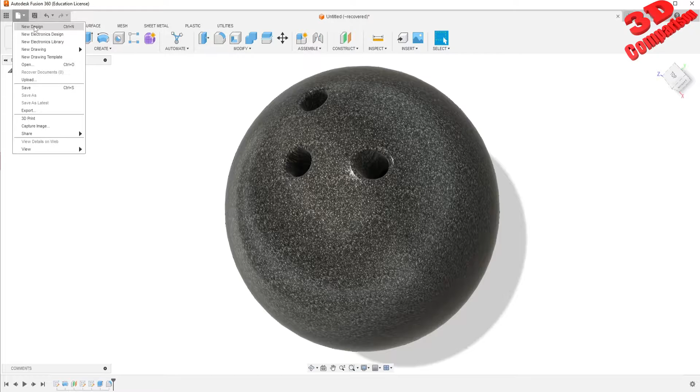I will enable the reference and create a new sketch. The sketch will be a circle, and the diameter will be 220 millimeters.

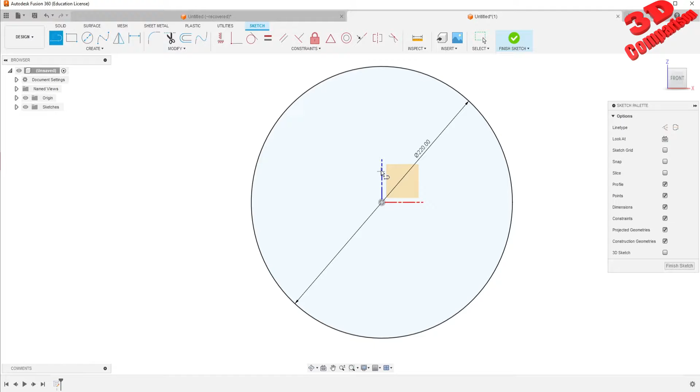I will also create a line in order to define the axis over here. As we can see within Fusion, we have the line option over here. If I drag my mouse over here, we're going to have this snap to the middle.

If I want to convert the line type, I can use this construction button, or there's also the possibility to use the hotkeys. In this case, if I press X, I can have this converted to an axis.

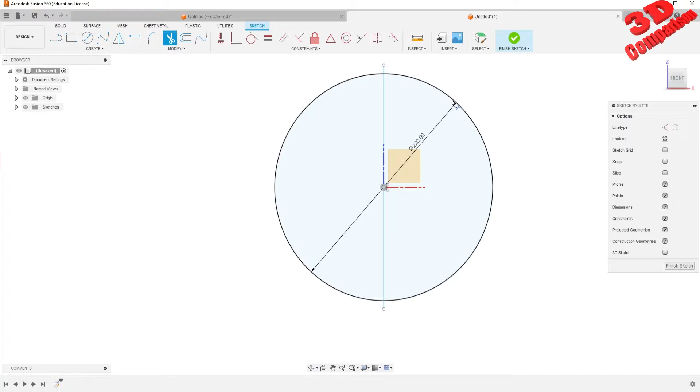But Fusion is a little bit different than CATIA and SolidWorks. That means we don't need to actually have a sketch with an axis. Therefore, I can leave this as a simple line, and afterwards, using the trim tool, I will cut half of this.

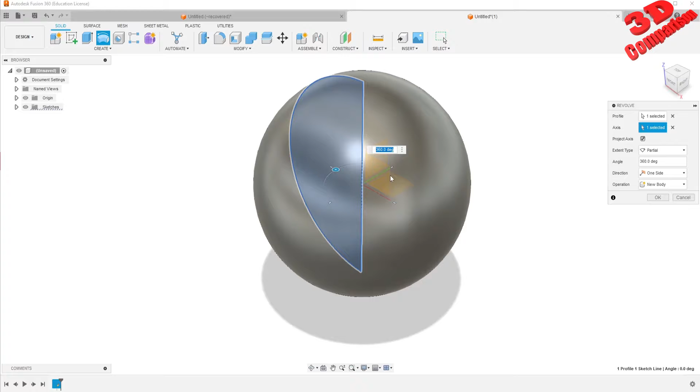And with the resulting profile, we're gonna enable a revolve over here. As you can see, the profile will be selected and we just need to define the axis. In this case, the axis can be the middle line, and we're gonna see how that sketch will be revolved.

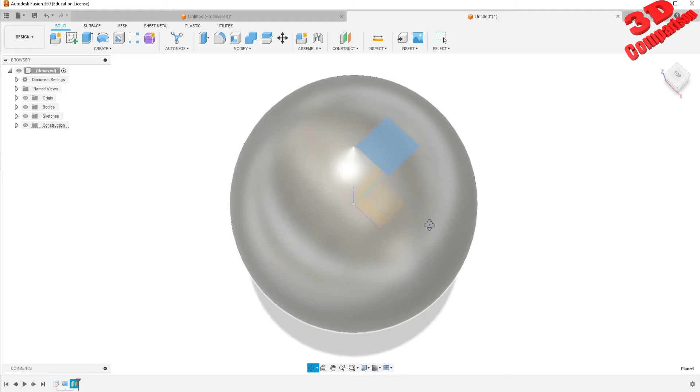Now, to define the cutouts, I will create an offset plane starting from the X and Y plane. I will increase the offset value to 110 millimeters, and this plane will be normal to the top of the sphere over here.

Therefore, I can create a new sketch within the newly defined plane. And within the origin, I will create a circle, a 20 millimeter diameter circle.

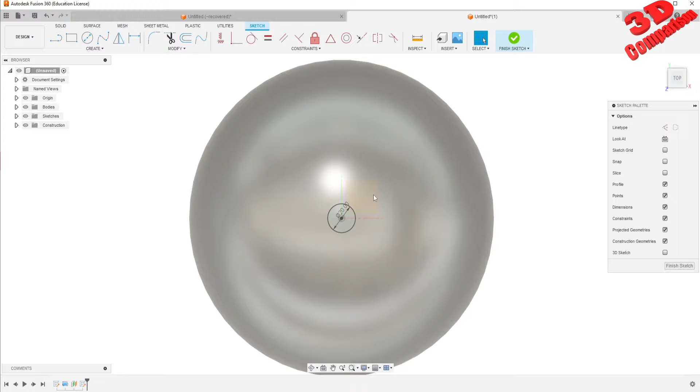Afterwards, since I am within the sketch, within the same sketch position at the top, I will create a new circle, again 20 millimeters. If I rotate, I will see that both of those circles are defined within the same plane.

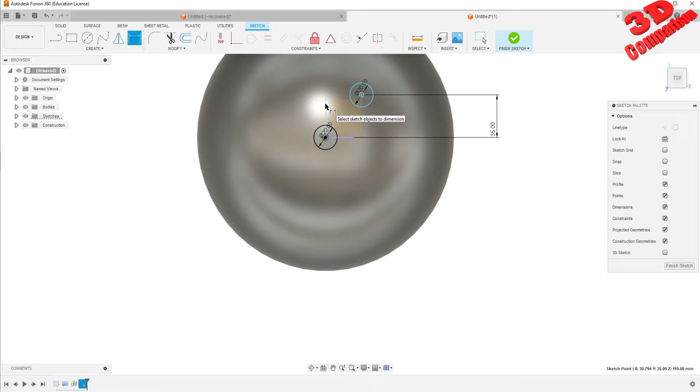And I can also add some constraints all the way to the axis. To the x-axis, I will add 35, and also for the y-axis, the same value, 35 millimeters.

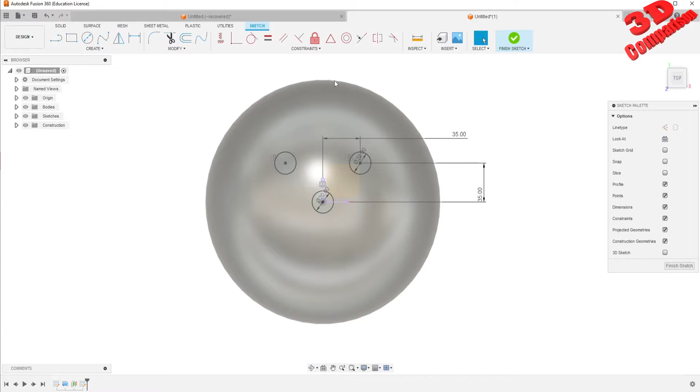Now I will use the mirror tool. The object will be the circle, and for the mirror line, I can use the axis line over here. This is similar to CATIA. Within SolidWorks, we had to draw an axis over there.

Now, within Fusion, we can have those extruded cut, so we are going to use the same feature over here. We see extrude, we also have a hotkey, which is E. And for the profiles, I will select the three circles.

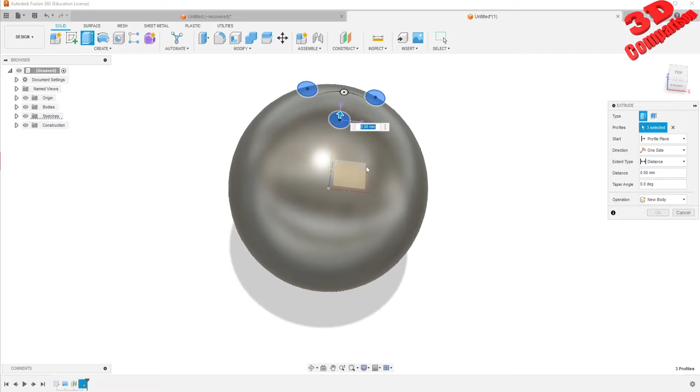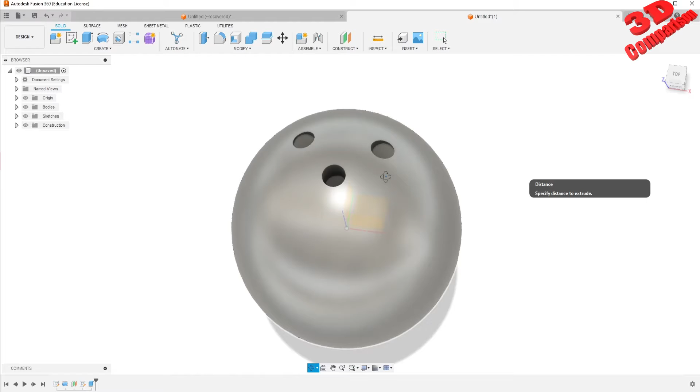If I will move the arrow towards, let's say, inwards to the object, we're going to see that this will be changed to cut, and we're going to have this red cutout area over here. So if I make this minus 20 millimeters, we're gonna see how those will be cut.

If you want to increase the value of the cut, we can always edit the feature at the bottom. So I will make this minus 40 in this case.

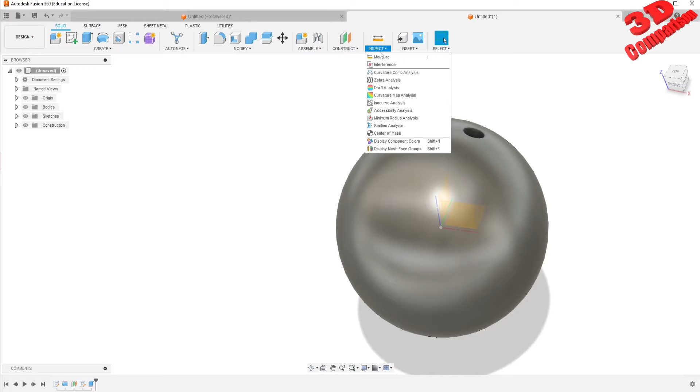Now, just like within my previous videos in CATIA and SolidWorks, if I go and do a section analysis over here, I will have this flipped. We're gonna see that all the cuts are done like this, on the z-axis, so they are not normal to the surface of the sphere.

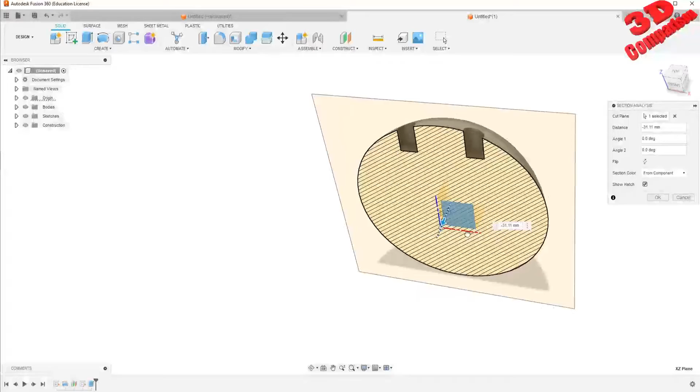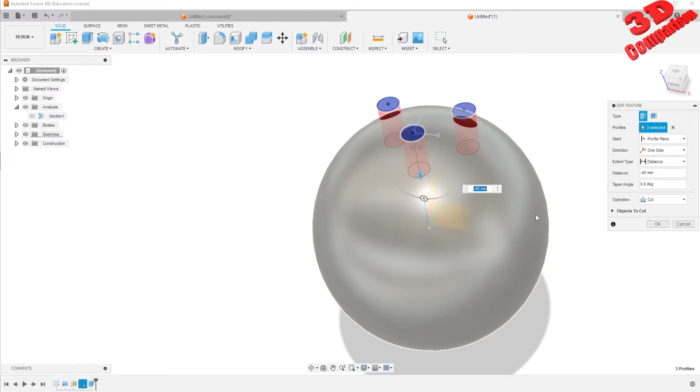Therefore, if you want to change the cuts to be created, let's say, normal to the surface, we have the possibility to do that. I will close the section analysis. So to do that, over here within the analysis, I can just hide the section, and that will clear the viewport.

And within this extrusion, I will only have the middle cutout, since this was created directly tangent to the surface, so this cut goes to the z-axis. But for the others, I will create a new sketch.

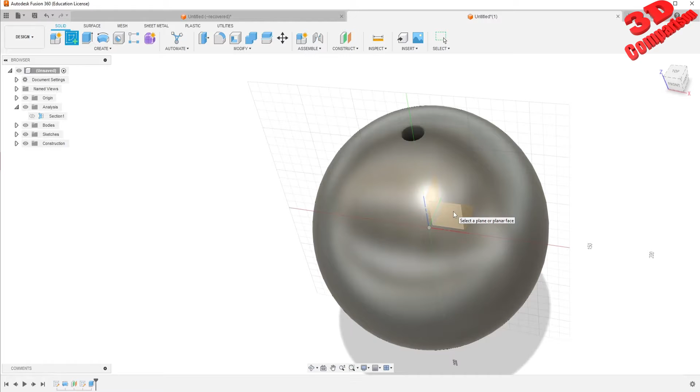And over here I have the possibility to create a new sketch, for example, in the side plane over here on the X and Z reference. And I will create a point over here, so I can position that point, for example, over there.

I can add some constraints for that point. As we can see, we're gonna add the 110 millimeters distance over here, so that means the point will be positioned directly on that outer surface.

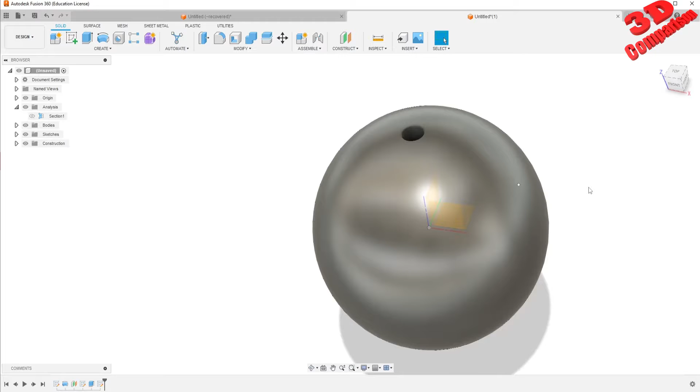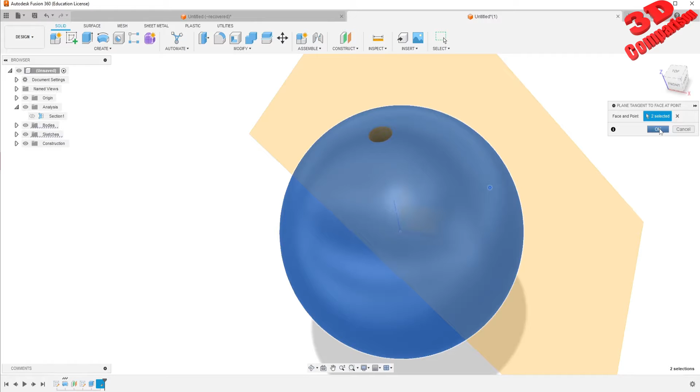And afterwards, within the construction, we have the possibility to use a plane tangent to a face at a point. We can select that point, the surface. Keep in mind that for the plane tangent to face at a point, both of those will be added over here, face and point, there are no different fields for that. And now within the newly defined plane, I can create a new sketch.

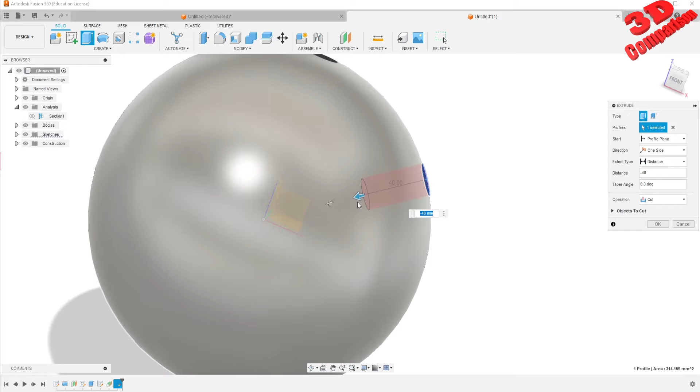I will create a 20 millimeter circle. And if I go with extrude cut, inwards, for example 40 millimeters, you're gonna see how this cut will go normal to the surface. Therefore, we're gonna have a cut that will look like this.

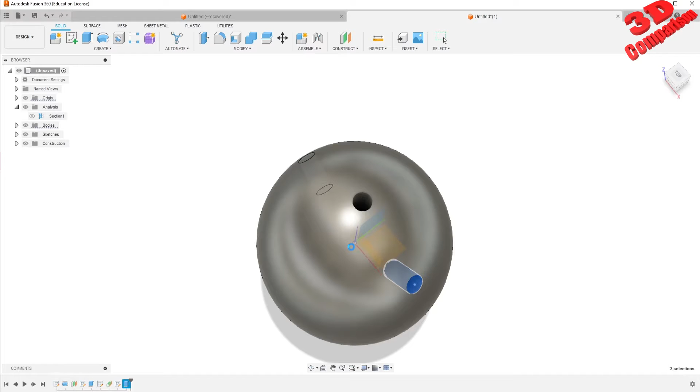Now we can also have this mirrored on the other side, but we can also do a different cutout. So if I'm going to use the mirror, in order to find it within Fusion, we'll have it positioned over here. We can only mirror the features, in this case the extrude cut, extrude 2. I can select the mirroring plane, which will be that one. If I click OK, we're going to have those cuts within the bowling ball.

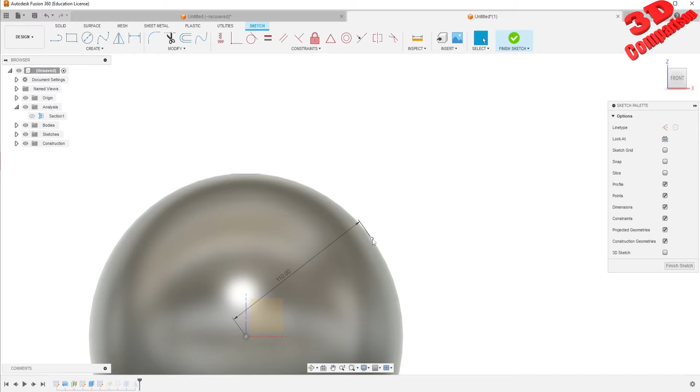Now, if you want to change the position of those cuts, we have the possibility to change the location of the point. For that, I need to search the sketch where we have the point, which is this one. If I increase this all the way closer to the top, we see the initial cutout over here. We have the point position over there. Afterwards, we're going to have those changed over here.

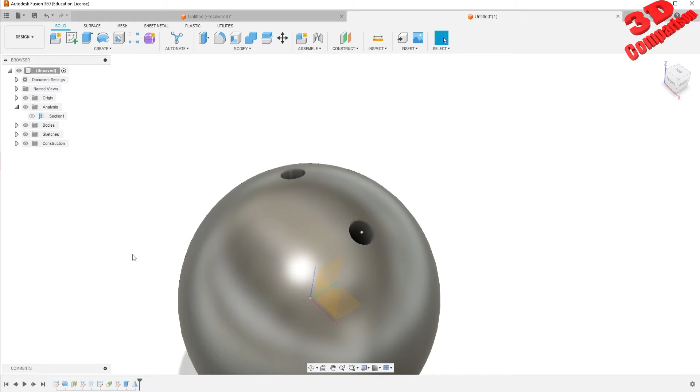Now, if I would like to have the initial cutout no longer active, we have the possibility to come over here and have this suppressed. So we can suppress the initial feature, and afterwards create an additional point for the other cutout. For example, I will create a new point over here. I will add that dimension all the way to the origin, so we know that we had 110 millimeters.

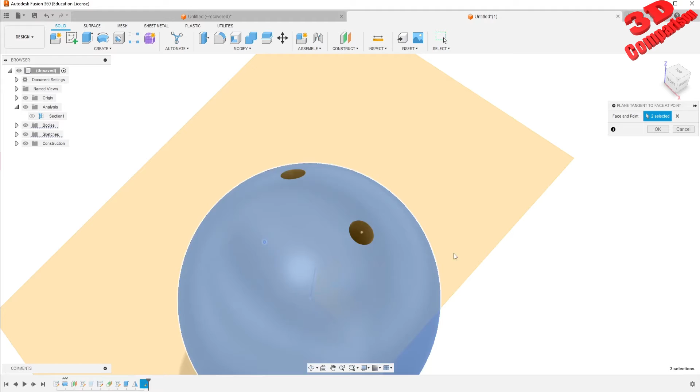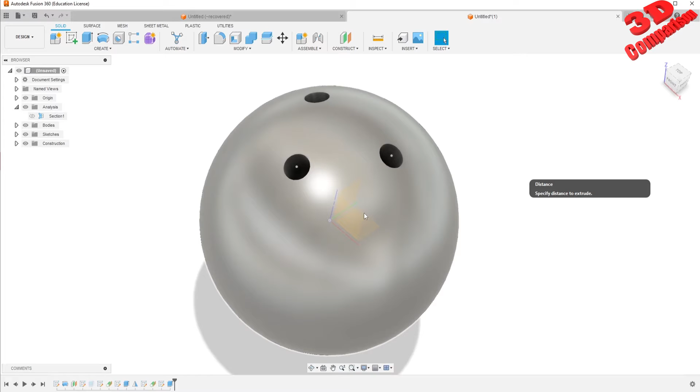Again, I will create a plane tangent to the point and the face. Over here I will jump in and create a new circle. With that selected, I will go inwards minus 40 millimeters, and that will define the cut. So this is what I like about Fusion, the ease of use compared to CATIA and SolidWorks in this case.

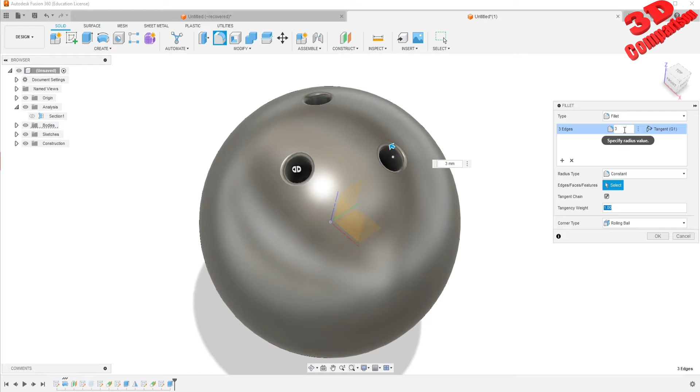Now to address also a fillet over here, some dress-up features for the bowling ball. I have the possibility to select all those over here, add a tangency, so we have this tangent. I will just add a radius of 3 millimeters, and afterwards leave the tangency weight at 1 and click OK. And we're gonna see how we're gonna have that rounded edge.

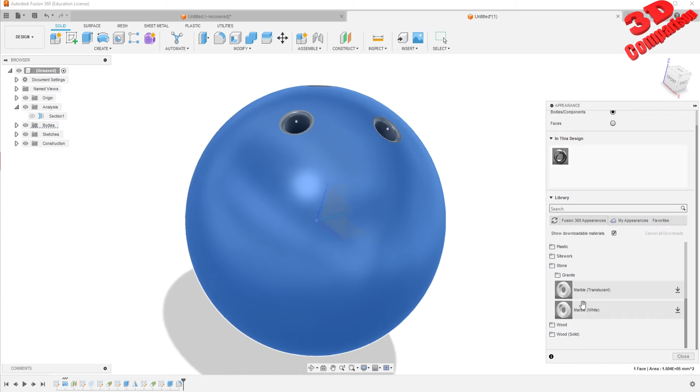Now, to address the appearance, we have the possibility to either right click over here, afterwards go to appearance. We see the hotkey, the default one, which is A. Over here we can search for a material. In this case I will go for stone, granite, and I will use the blue pearl texture over here.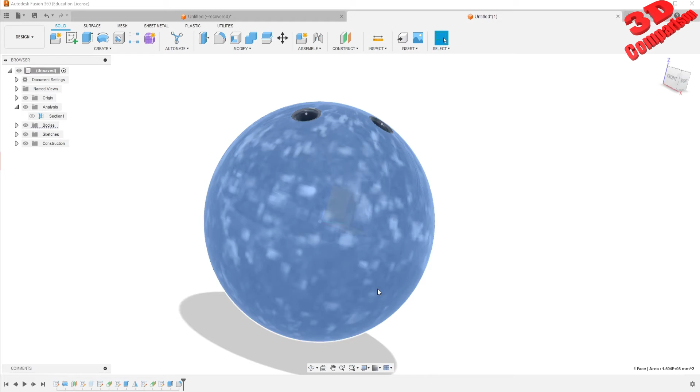As we can see, the material size is quite large, therefore we have a pixelated material over here. We can change the texture map controls for this one. As you can see, I will have this projected to be spherical, and I can also choose an axis. I will go for the z-axis for this case study, but the texture is still quite pixelated.

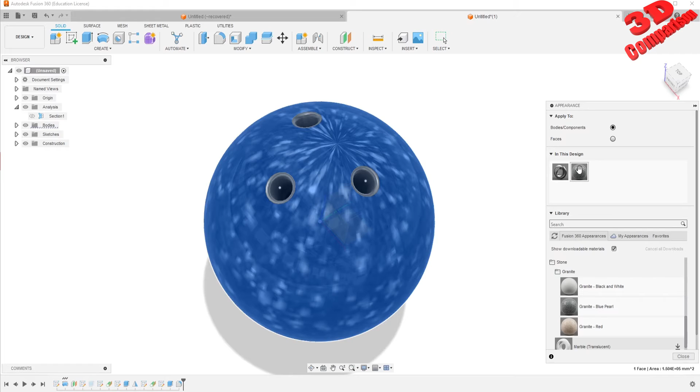Therefore, we can go back to the appearance. Over here we have the materials added to the design part, so I will double click on this and we can change the scale of this. I will type in, for example, 15, and we're gonna see how that texture will be wrapped.

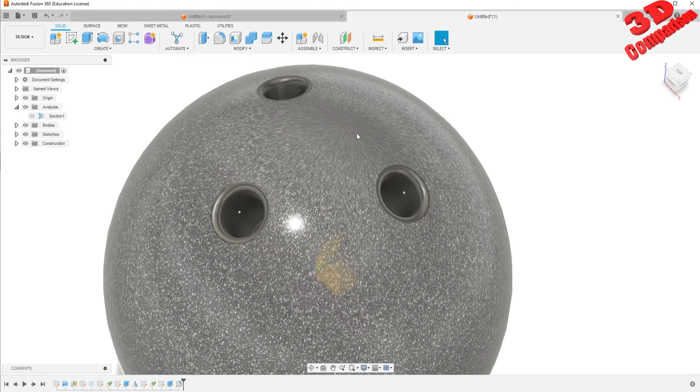Since I have this mapped spherically on the z-axis, we're gonna have that texture point over here where the points are wrapped. Therefore, if you want to do a render and you don't want to have that visible, you can change the mapping.

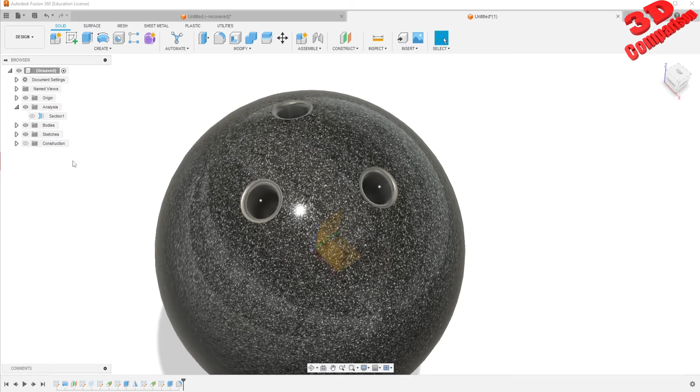So over here within the mapping controls, I will just choose a different axis, for example the x-axis, and now the top won't have that problem, but it will be present on the sides. This is a common problem within computer-aided design software, that it's a little bit trickier to do proper mapping for spherical elements. This is why it's important to use either software like Keyshot or Blender to address these problems.

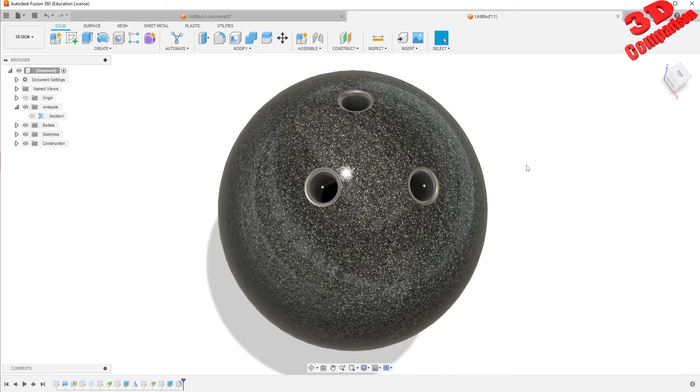But overall, we see that for the modeling part, Fusion does an excellent job when we want to create some cutouts that go tangent to the face of the surface. So if I go over here in a section, we're gonna see how those cuts will look like.

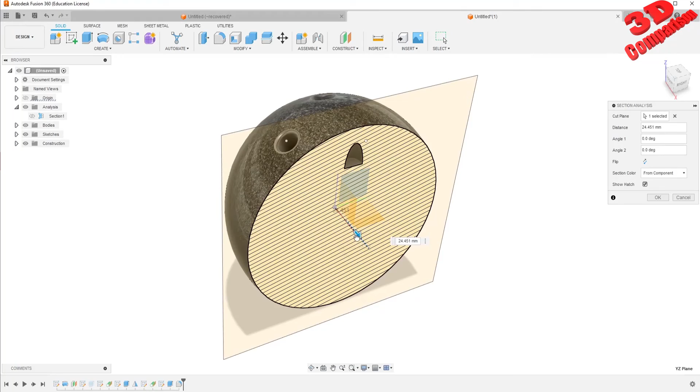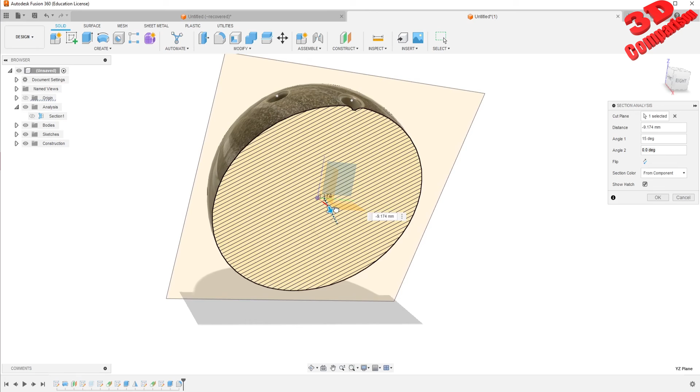So we have that initial cut, the second one over here. Also, a section in plane is a little bit off, as we can see, since this is done at an angle. Therefore, we could change the angle over here of the section cut to better visualize that profile. So we see with 5 degrees, I can go with it a bit more, so somewhere around 15 degrees we're gonna see that profile better for the other cutouts.